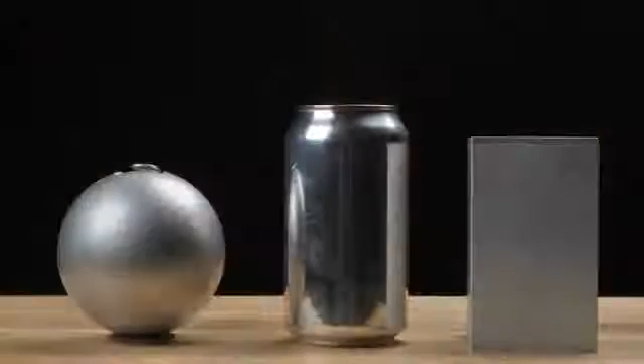But the cuboid surpasses the sphere in packing efficiency. It has almost no wasted space, although at the sacrifice of using more surface area to contain the same volume as the sphere. So, to create a can, engineers use a cylinder, which has elements of both shapes. From the top, it's like a sphere, and from the side, it's like a cuboid. A cylinder has a maximum packing factor of about 91%, not as good as the cuboid, but better than the sphere. Most important of all, the cylinder can be rapidly manufactured.

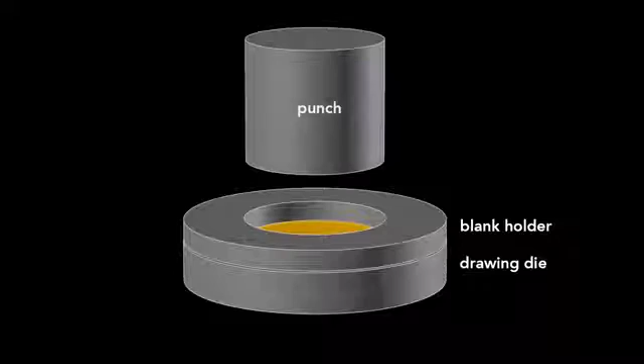The can begins as this disc called a blank, punched from an aluminum sheet about 3/10 of a millimeter thick. The first step starts with a drawing die, on which sits the blank and then a blank holder that rests on top. We'll look at a slice of the die so we can see what's happening. A cylindrical punch presses down on the die, forming the blank into a cup. This process is called drawing.

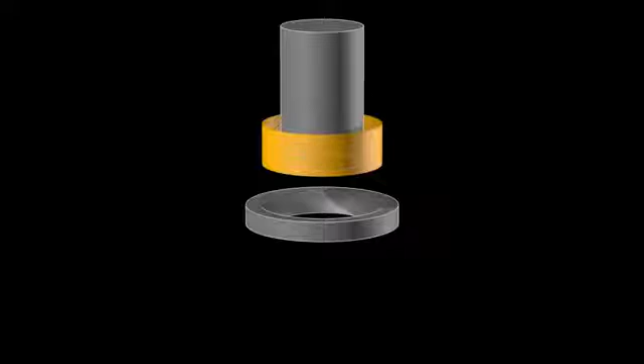This cup is about 88 millimeters in diameter, larger than the final can, so it's redrawn. That process starts with this wide cup and uses another cylindrical punch and a redrawing die. The punch presses the cup through the redrawing die and transforms it into a cup with a narrower diameter, which is a bit taller. This redrawn cup is now the final diameter of the can, 65 millimeters, but it's not yet tall enough.

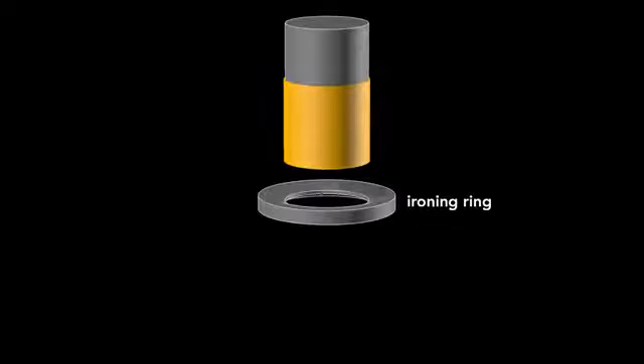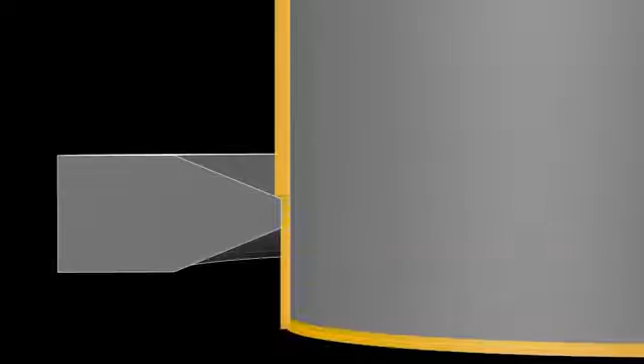A punch pushes this redrawn cup through an ironing ring. The cup stays the same diameter as it becomes taller and the walls thinner. If we watch this process again up close, you see the initial thick wall and then the thinner wall after it's ironed. Ironing occurs in 3 stages, each progressively making the walls thinner and the can taller.

After the cup is ironed, the dome on the bottom is formed. This requires a convex doming tool and a punch with a matching concave indentation. As the punch presses the cup downward into the doming tool, the cup bottom then deforms into a dome. That dome reduces the amount of metal needed to manufacture the can. The dome bottom uses less material than if the bottom were flat.

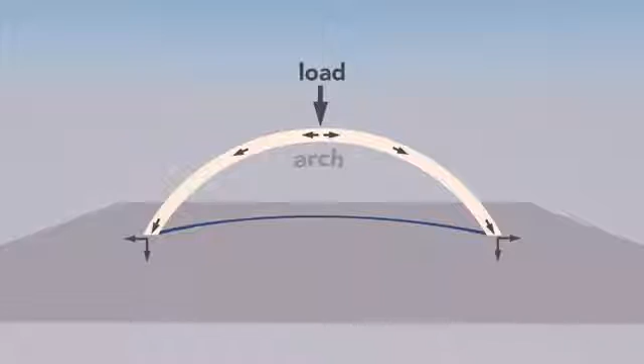A dome is an arch revolved around its center. The curvature of the arch distributes some of the vertical load into horizontal forces, allowing a dome to withstand greater pressure than a flat beam.

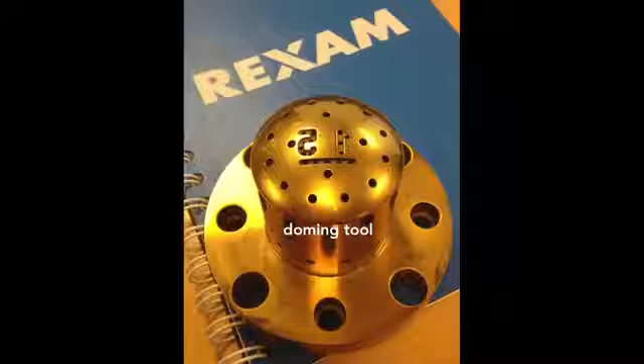On the dome, you might notice 2 large numbers. These debossed numbers are engraved on the doming tool. The first number signifies the production line in the factory, and the second number signifies the body maker number. The body maker is the machine that performs the redrawing, ironing, and doming processes. These numbers help troubleshoot production problems in the factory. In that factory, the manufacturing of a can takes place at a tremendous rate.

These last 3 steps, redrawing, ironing, and doming, all happen in one continuous stroke and in only 1/7 of a second. The punch moves at a maximum velocity of 11 meters per second and experiences a maximum acceleration of 45 Gs. This process runs continuously for 6 months or around 100 million cycles before the machine needs servicing.

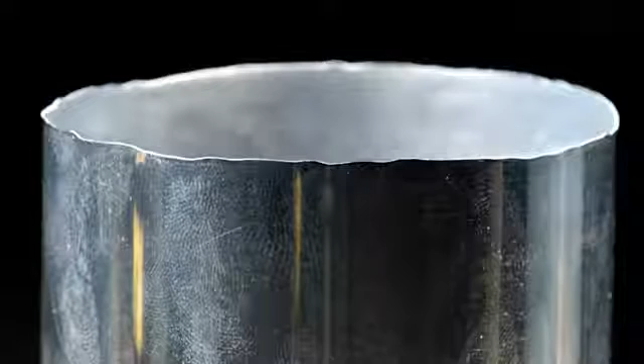Now, if you look closely at the top of the can body, you see that the edges are wavy and uneven. These irregularities occur during the forming. To get a nice, even edge, about 6 millimeters is trimmed off of the top. With an even top, the can can now be sealed.

But before that sealing occurs, a colorful design is printed on the outside. The term of art in the industry is decoration. The inside also gets a treatment. A spray-coated epoxy lacquer separates the can's contents from its aluminum walls. This prevents the drink from acquiring a metallic taste and also keeps acids in the beverage from dissolving the aluminum.

The next step forms the can's neck, the part of the can body that tapers inward. This necking requires 11 stages. The forming starts with a straight-walled can. The top is brought slightly inward, and then this is repeated further up the can wall until the final diameter is reached. The change in neck size at each stage is so subtle that you can barely tell a difference between one stage and the next.

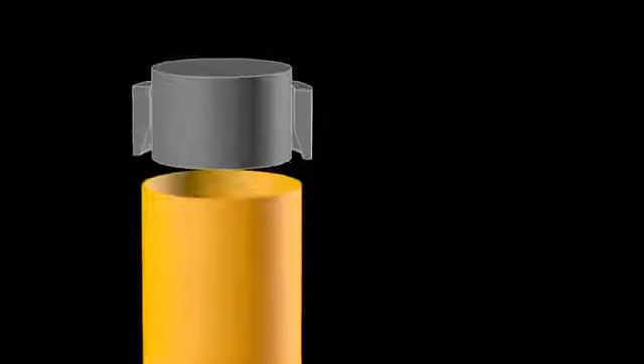Each one of these stages works by inserting an inner die into the can body, then pushing an outer die, called the necking sleeve, around the outside. The necking sleeve retracts, the inner die retracts, and the can moves to the next stage. The necking is drawn out over many different stages to prevent wrinkling or pleating of the thin aluminum.

Since the 1960s, the diameter of the can end has become smaller by 6 millimeters, from 60 millimeters to 54 millimeters today. This seems a tiny amount, but the aluminum can industry produces over 100 billion cans a year, so that 6 millimeter reduction saves at least 90 million kilograms of aluminum annually. That amount would form a solid cube of aluminum 32 meters on a side. Compare that to a 787 Dreamliner with a 60-meter wingspan.

Now, after the neck has been formed, the top is flanged. That is, it flares out slightly and allows the end to be secured to the body, which brings us to the next brilliant design feature, the double seam. On older steel cans, manufacturers welded or soldered on the ends. This often contaminated the can's contents. In contrast, today's cans use a hygienic double seam, which can also be made faster. This can is cut in half so you can see the cross-section of the double seam.

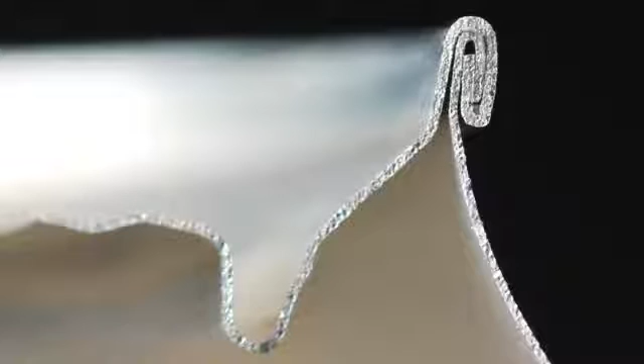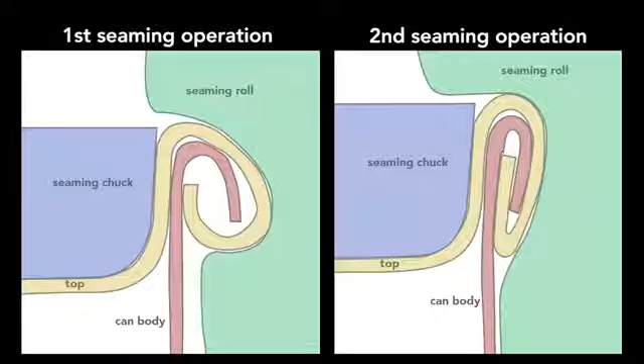To create this seam, a machine uses two basic operations. The first curls the end of the can cover around the flange of the can body. The second operation presses the folds of the metal together to form an airtight seal. While the operations themselves are simple, they require high precision. Parts misaligned by a small fraction of a millimeter cause the seam to fail.

In addition to the clamping of the end and can body, a sealing compound ensures that no gas escapes through the double seam. The compound is applied as a liquid, then hardens to form a gasket. The end, attached immediately after the can is filled, traps gases inside the can to create pressures of about 30 psi or 2 times atmospheric pressure. In soda, carbon dioxide produces the pressure. In non-carbonated drinks like juices, nitrogen is added.

So why is a beverage can pressurized? Because the internal pressure creates a strong can despite its thin walls. Squeeze a closed pressurized can, it barely gives. Then squeeze an empty can. It flexes easily. The can walls are thin, only 75 microns thick, and they're flimsy. But the internal pressure of a sealed can pushes outwards equally and so keeps the wall in tension.

This tension is key. The thin wall acts like a chain. In compression, it has no strength, but in tension, it's very strong. The internal pressure strengthens the cans so that they can be safely stacked. A pressurized can easily supports the weight of an average human adult. It also adds enough strength so that the can doesn't need the corrugations like in this unpressurized steel food can.

While initially pressurized to about 2 atmospheres, a can may experience up to 4 atmospheres of internal pressure in its lifetime due to elevated temperatures, and so the can is designed to withstand up to 6 atmospheres or 90 psi before the dome or the end will buckle.

Why is there a tab on the end of the can? It seems a silly question. How else would you open it? But originally, cans didn't have tabs. Very early steel cans were called flat tops for pretty obvious reasons. You use a special opener to puncture a hole to drink from and a hole to vent. In the 1960s, the pull tab was invented so that no opener was needed.

The tab worked like this. You lift up this ring to vent the can and pull the tab to create the opening. Easy enough, but now you've got this loose tab. The cans ask you to please don't litter, but sadly these pull tabs got tossed on the ground where the sharp edges of the tabs cut the bare feet of beachgoers or they harmed wildlife. So the beverage can industry responded by inventing the modern stay-on tab.

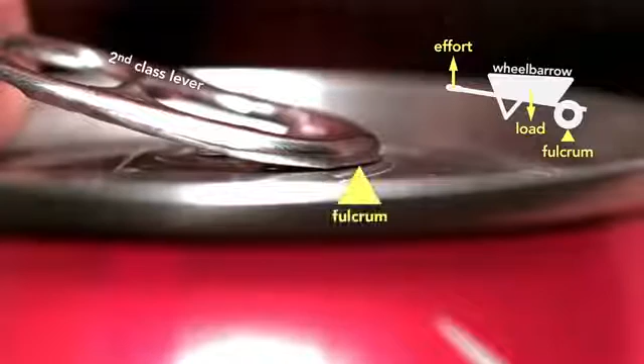This little tab involved clever engineering. The tab starts as a second-class lever. This is like a wheelbarrow because the tip of the tab is the fulcrum and the rivet the load. The effort is being applied on the end. But here's the genius part. The moment the can vents, the tab switches to a first-class lever, which is like a seesaw, where the load is now at the tip and the fulcrum is the rivet.

You can see clearly how the tab, when working as a wheelbarrow, lifts the rivet. In fact, part of the reason this clever design works is because the pressure inside the can helps to force the rivet up, which in turn depresses the outer edge of the top until it vents the can, and then the tab changes to a seesaw lever.

Looking from the inside of the can, you can see how the tab first opens near the rivet. If you try to simply force the scored metal section into the can using the tab as a first-class lever with the rivet as the fulcrum throughout, you'd be fighting the pressure inside the can. The tab would be enormous and expensive.

The aluminum beverage can is so ubiquitous that it's easy to take for granted. But the next time you take a sip from one, consider the decades of ingenious design required to create this modern engineering marvel. I'm Bill Hammack, the Engineer Guy.